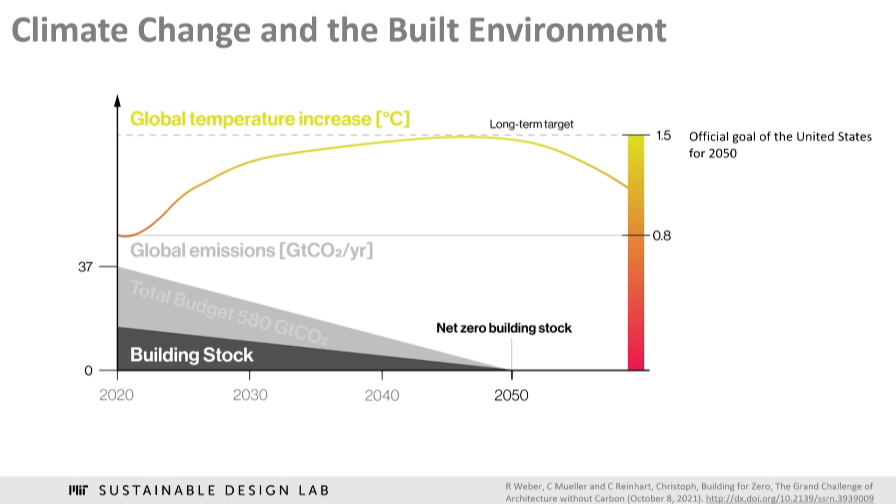We know buildings right now are responsible for about 40% of carbon emission, so that black wedge is ours, so to speak. And it means in two simple numbers, we have 300 gigatons and 30 years left to have the whole global building stock carbon neutral. So that's our budget and the timeline that we have. So what are we going to do with that?

Well, first we have to look at how many buildings we're actually talking about. And what you see here is actually that globally the building stock is going to double in the next 30 years. So we basically have to focus on both the existing buildings, which are half of what we are expected to have by 2050, as well as new construction.

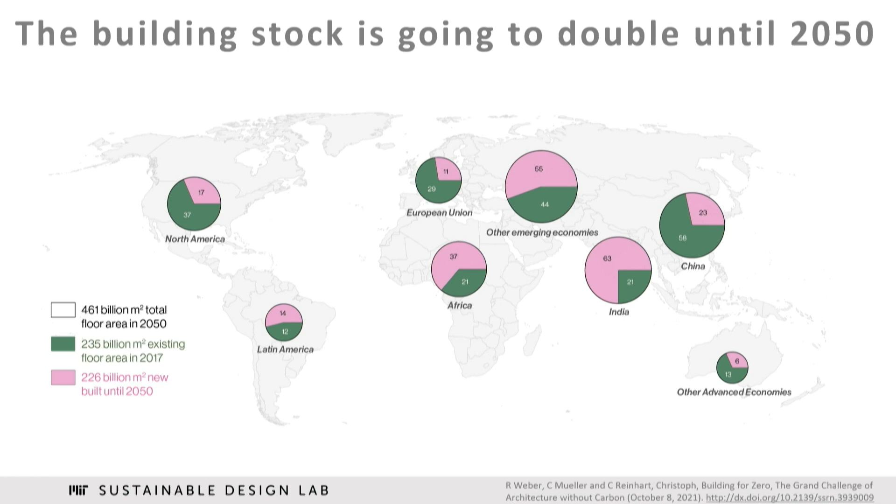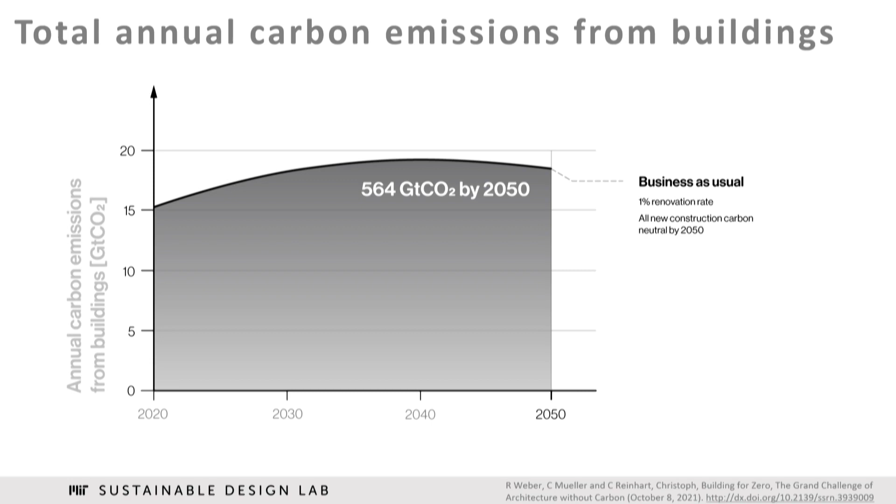And so if I start us off with a business as usual case, right now business as usual means that we are retrofitting about 1% of the global building stock every year. And we might, by 2050, have solutions for carbon neutrality for all buildings. Then we're going to blow through the whole budget that we have as a humanity, and by 2050, we haven't gotten anywhere.

So what we really have to do is we have to focus both on the operational energy of buildings, so how much buildings use while they're being operated, heating, cooling, and electricity, and so forth, as well as the embodied energy. So all new buildings that are being built, we have to start ramping that down, use materials that are net zero carbon. And when we look at this, it's an enormous task.

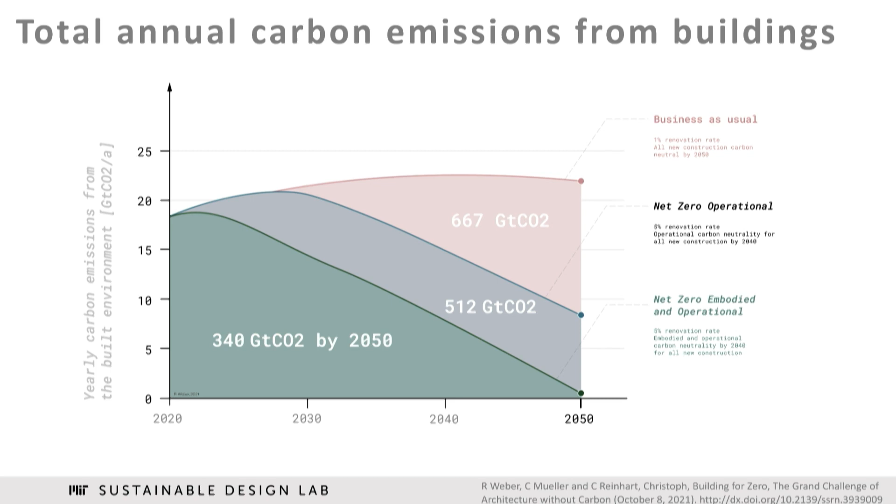Two simple kind of tasks for us to remember is we have to increase the annual retrofitting rate to 5% per year by 2030. And we have to make all new construction types carbon neutral by 2040 as well. So now let's jump into some buildings. How is this actually possible?

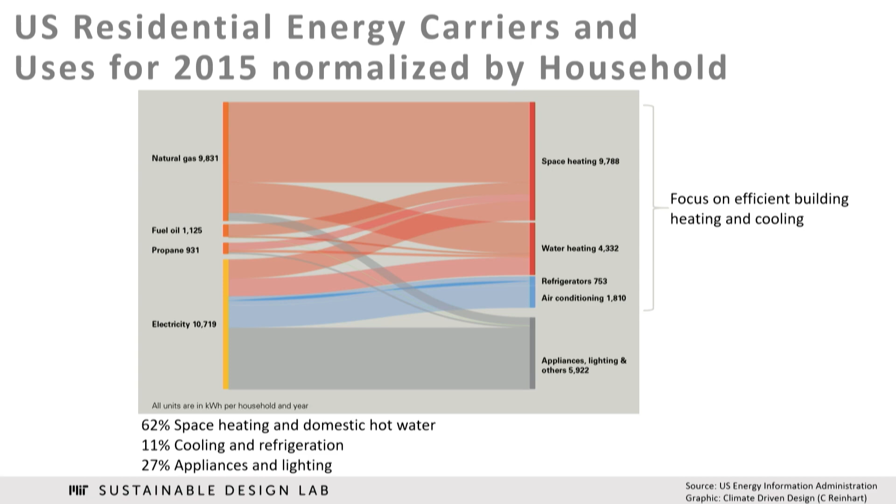What you see here is for 2015, the data for all residential buildings in the US, normalized per household: what did we use as fuel sources and how did we spend that in buildings? And you see natural gas, propane, electricity is the type of fuel sources that we had. And then we spend 70% of that on heating and cooling residential buildings. So this is where this strong focus comes from. We have to reduce that number.

So how are we actually going to do that? I think it's Mark Twain who said, talk is cheap unless Congress is talking. So we just heard there is a huge amount of funds available in the next couple of years. And so I'm going to tell you a little bit of a story of what an owner of a building might want to do and how that then relates to the grid as a whole.

So if you are the owner of a typical home in New England, this is what these numbers are specifically for, and the building hasn't been renovated, old building, you love it, you don't love your utility bills, which are about $3,900 per year, you spend $1,700 on gasoline, and you and your family, if you assume a family of 4, you are spending 16 tons of carbon per year.

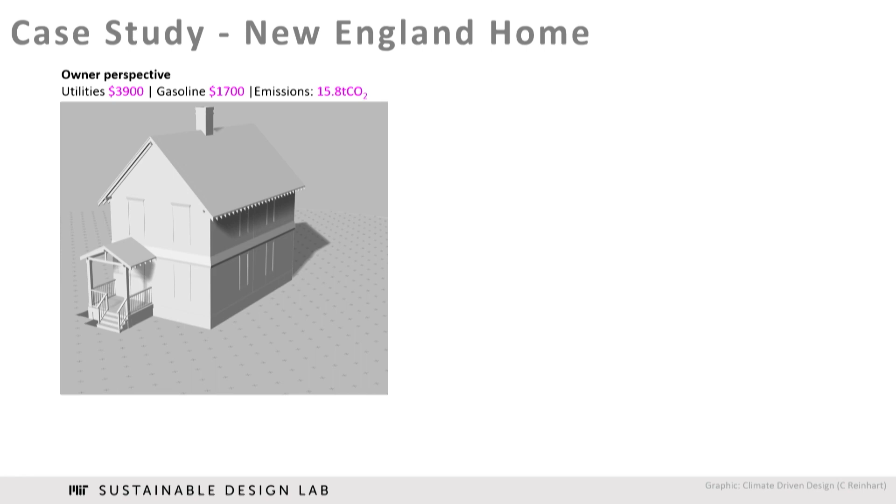So how do you look as a customer? Well, you are a great customer for natural gas. You're using an enormous amount, as you see on the right-hand side, during the winter months, and your electricity use is pretty constant throughout the year. You have a little bit of peaks due to the air conditioning system that you're using for electricity.

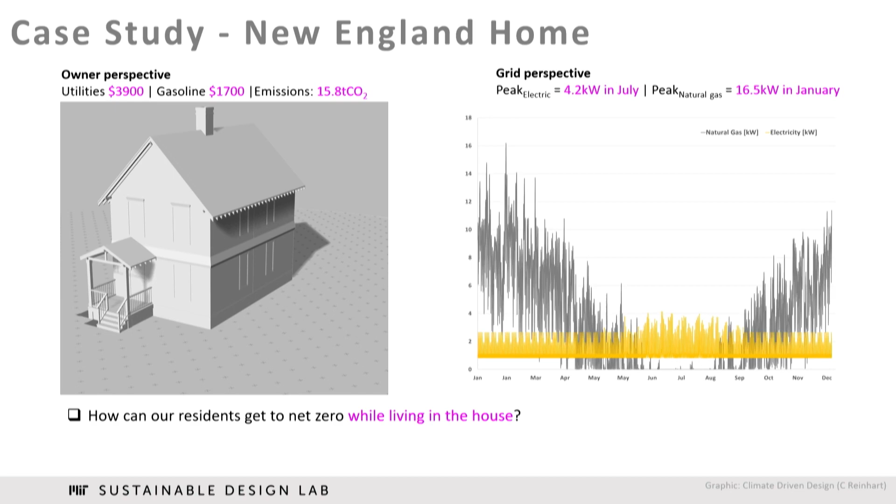So now you're opening the newspaper and people just tell you, oh, you should really get a solar system, do something good for the world and get a heat pump. And you think, yes, I want to do good in the world, so I'm going to place these big heat pumps in front of my house that everybody sees them, and I'm going to fill my rooftop with PV. So what would that do effectively?

So you're spending about $53,000 on that, and you get your money back in 10 years. And on paper, since you oversized your PV system, you get a couple of $100 every year back. You still spend all the money on your gasoline.

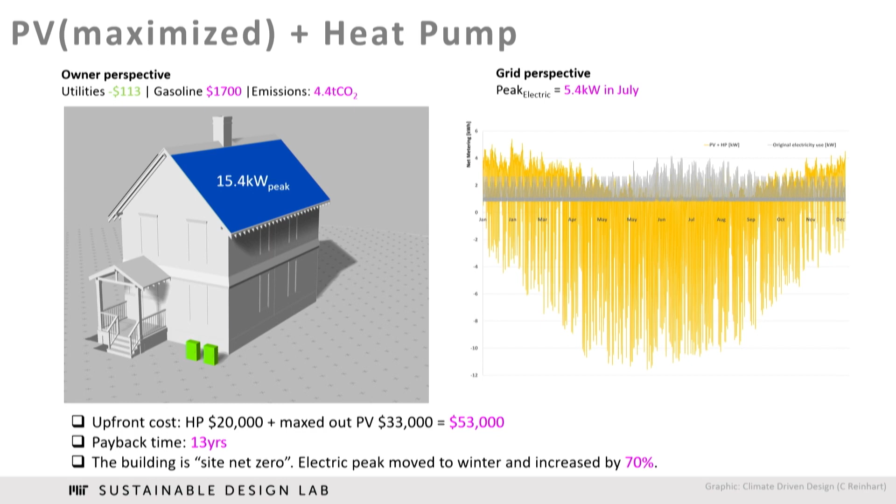How do you look on the right-hand side? Basically in gray, you see your old profile for electricity. In yellow, you see the monstrosity of a client that you are. You're basically somebody that dumps huge amounts of electricity when nobody wants it in the summer into the grid. And you increase the peak by 70% due to your heat pump. So the utility doesn't love you particularly and tries to convince you to do something else.

And so then hopefully you get a good contractor who's working with you and says, well, you should get efficient appliances, LED lighting, smart controls; Mass Save and other institutions pay for you to insulate your walls. And rather than having this oversized PV system, make the PV system as large as you actually need it. And when you do that, you basically now are dealing with 10 years of payback time for a system like this.

And when you look on the right-hand side, what happened, you still moved your electricity peak to the winter, but at least it's the same height as it was before. So that just shows you it's of paramount importance that we retrofit our buildings. But then you don't like it that your roof is not full of PV. Is there any more money to be made?

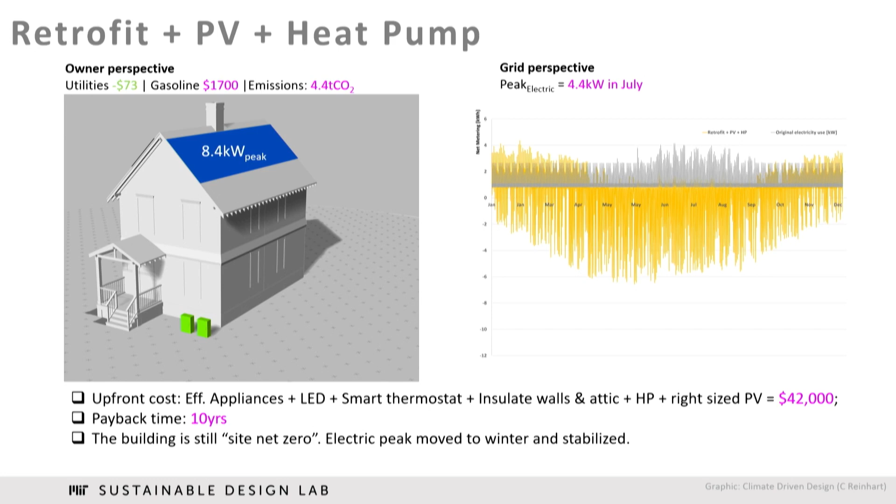So you're going back and you're starting filling the free area up again, and you're buying an electric car, nice Tesla, your neighbors are green with envy. So what happens then? You actually end up in a situation where you have no money that you spend on driving your car around anymore per year for operation. Your bill and your carbon emissions are zero. And since gasoline is quite expensive, well, not really, but relatively speaking, in 8.5 years you basically get your money back for the steal of $48,000.

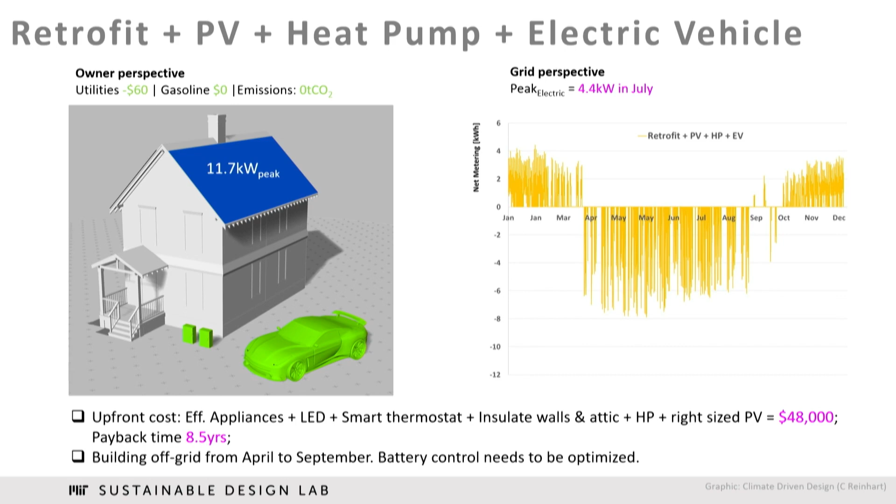So this just shows you that it's a really complicated system and very different things that you can do. And you can actually improve the peaks even more if we start integrating the controls better between how your Tesla is charged and discharged and the grid overall. So now you might wonder, is anybody willing to spend $50,000 on retrofitting their building?

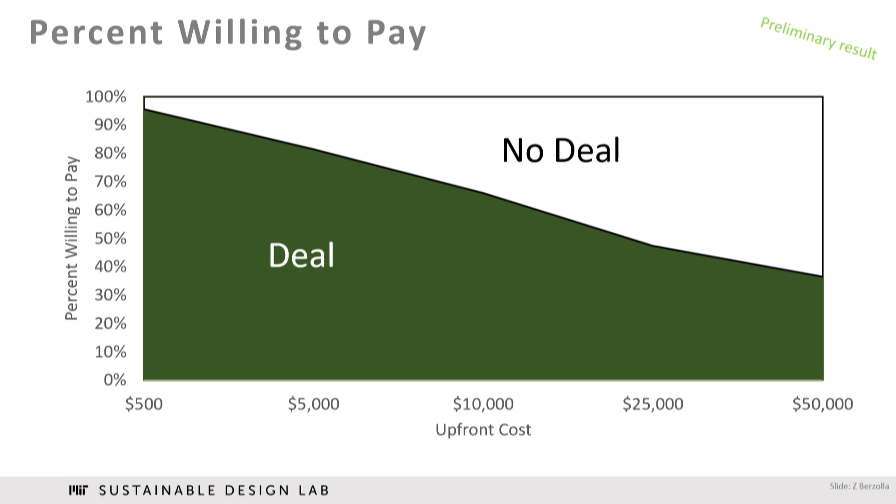We recently, through the center that Rob mentioned, did a survey with 1,500 homeowners in National Grid territory, and this is basically the deal, no deal line in terms of willingness to pay that we found. So 90% of owners will spend certainly $500, but you still have a respectable 30% of building owners surveyed willing to pay $50,000. So that's a sizable portion. Unfortunately, or not surprisingly, if you overlay income level, it's the higher income levels that are going to do this, that have money for this.

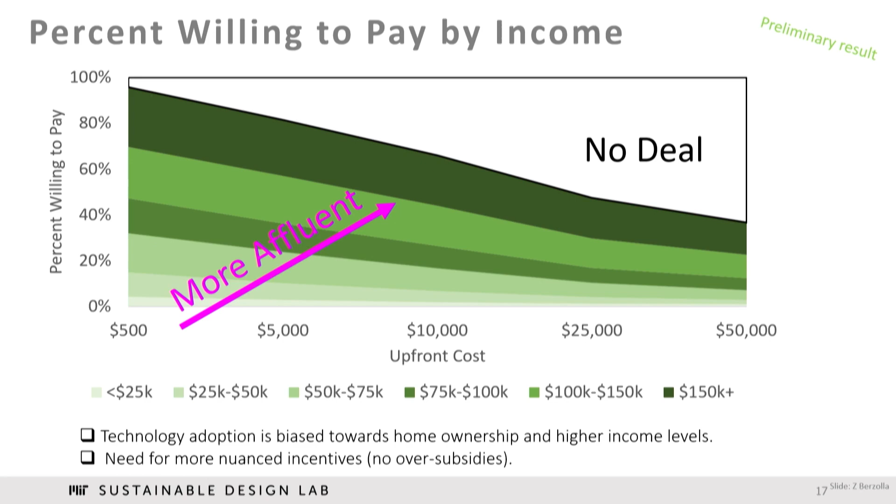So what this means is if we really want to have this type of development on a wider scale, we have to be very clever on how we're going to spend all this money that Rob promised us earlier today and make sure that everybody is basically benefiting from this. Right? So just quick words on new construction.

This is a trend, passive house, that you probably heard of that is really taking off in New England. I've taken this slide from Jeff Geisinger, who is the sustainability director of a mid-sized architecture firm here in town. And just to show you, they are working on 8 of these multi-unit residential passive houses. So these are extremely low energy residential buildings, really good envelope, tight envelope, and good ventilation systems. And a fair number of these projects include affordable housing as well. So this is really just a sweet spot right now that is worthwhile paying attention to.

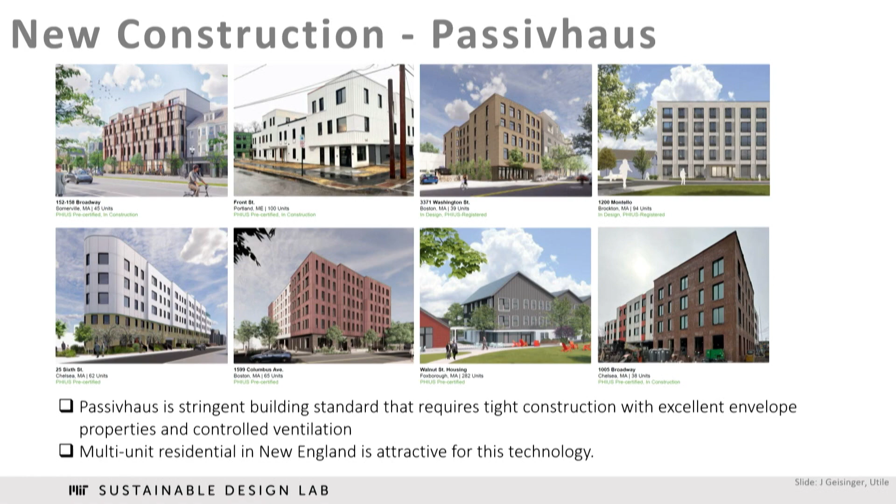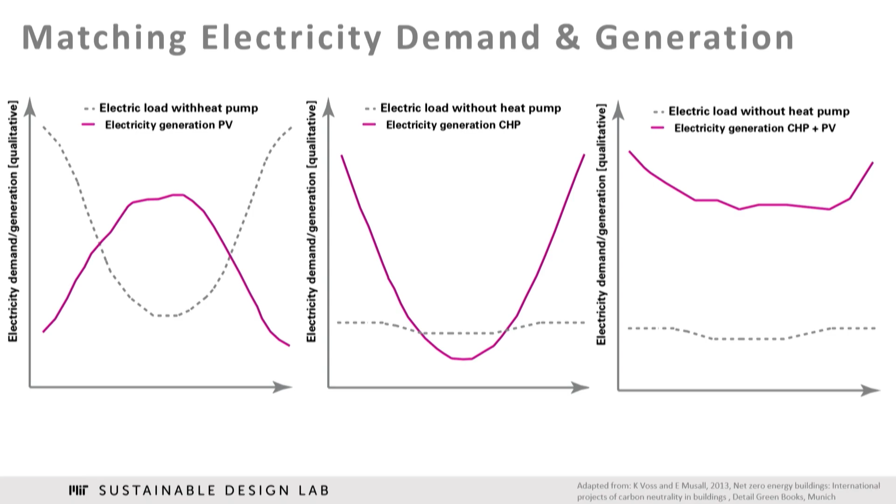Thank you. See if I can find the... Do you know, does it just keep going? Yeah. Where is the mouse? Oh, there it is. You see it? We lost the pointer. Yeah. So funny. Can you help us? Oh, there was some movement in the corner. Okay. All right. Okay, so I need to close this. And, where is mine? Hello. It's all in one. Good. All right, thank you very much. Can you turn it so you can see? Go one further. Okay, good.

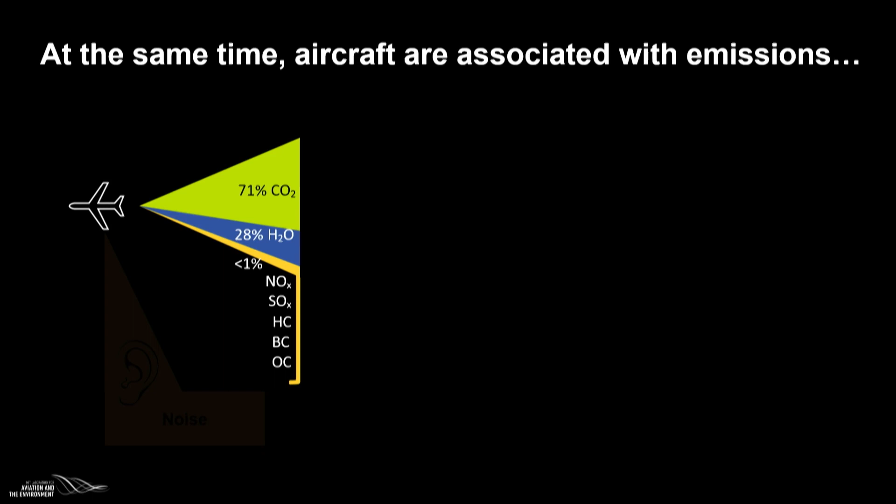All right, so I'm going to talk to you about aviation. As you know, we like to fly around, and as the world gets richer, more and more people like to travel. But of course, this has a problem. All that wonderful travel that we can have is associated with a lot of emissions. And the emissions affect the climate, and they affect air quality, and so human health, in a lot of different ways.

And so if you try to add up the harms from the different emissions, it turns out you have a lot of climate harm, primarily from the CO2 emissions, some also from the formation of contrails, which tend to net warm the world a little bit. And also you get a lot of air quality problems, some from particulates, but mostly from the NOx that's emitted by the jet engines as they fly.

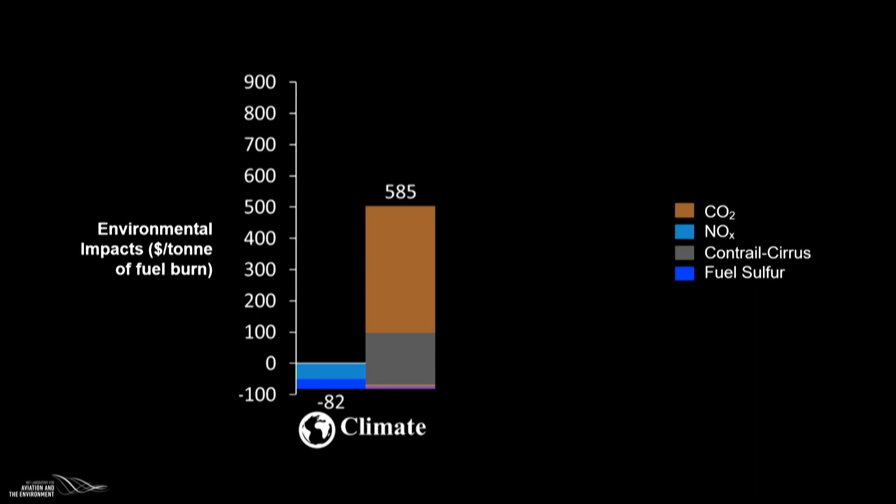And the total harm is about $860 per ton of jet fuel that's burned, which coincidentally is similar to the total cost. The economic cost of jet fuel is about $840 per ton. So the cost that the airlines or the passengers are paying for the jet fuel is only about half of the true cost to society. And the other half is borne by all of us by the fact that it's affecting the climate and it's causing medical problems for people.

So how can we fix this? There's kind of three directions. So one is you can change the way you operate aviation to try to minimize the contrail formation. I'm not going to talk about that. You can also reduce the CO2 emissions by going to low carbon fuels. I'll talk a bit about that since I'm a chemical engineer. And you can also do catalysis to try to reduce the NOx emissions, to reduce the health harm.

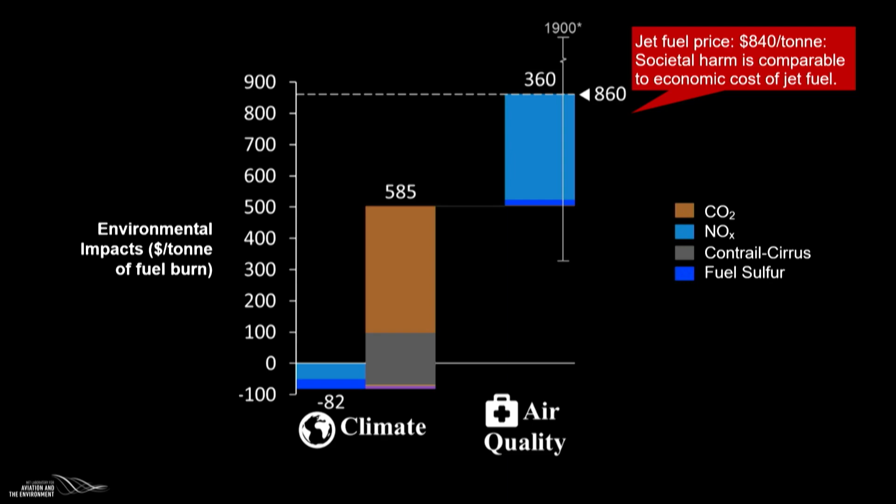So first let's talk about the low carbon fuels. The way it's being done right now is that almost all the jet fuel is fossil fuel from petroleum. But the airlines are starting to incorporate what's called sustainable aviation fuel, which is fuel that's made from biomass. It works fine, and it's a business, and I forget, a certain percentage of the jet fuel is sustainable aviation fuel. And fundamentally, that's coming from biomass and from food waste right now, actually, too.

However, this approach, which we're doing now, has some limitations. So one is if you account for the life cycle emissions, the sustainable aviation fuels are not really zero carbon fuels. They actually have pretty significant carbon intensity, and these are different types of sustainable aviation fuels, and the bars show what the actual emissions are.

And so, for example, if you used ethanol from corn to make your jet fuel, it would turn out that the total life cycle emissions would be about the same as using petroleum jet fuel. So you wouldn't actually gain anything by doing that. But some of the biomass routes actually do significantly reduce the CO2 emissions, but none of them go to zero.

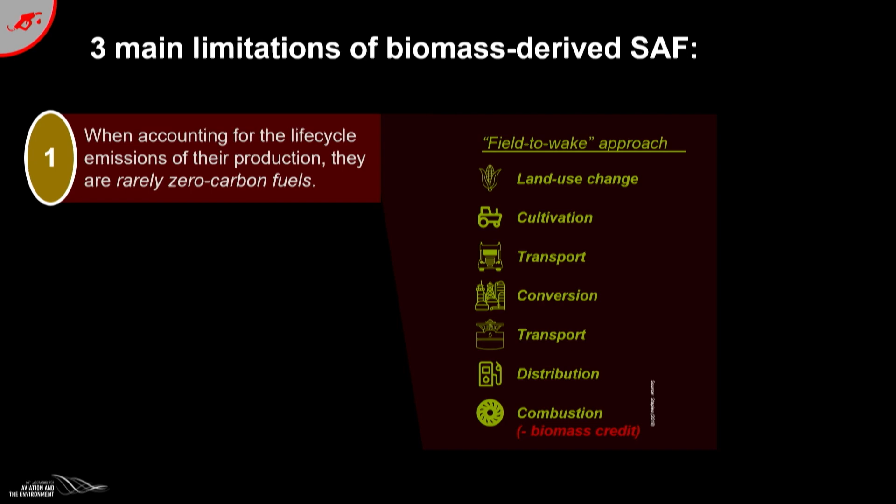Also, the biomass-sourced SAFs, sustainable aviation fuels, are more expensive than the petroleum fuels. And so this is going to be true for almost all solutions to climate problems: it's going to cost more. It's not unaffordable, but you have an economic, policy, regulatory problem of how you get people to go for a more expensive option instead of sticking with the already developed option, which is cheaper. They call it willingness to pay, but it's sort of how willing the government is to force people to do it, which is a key issue.

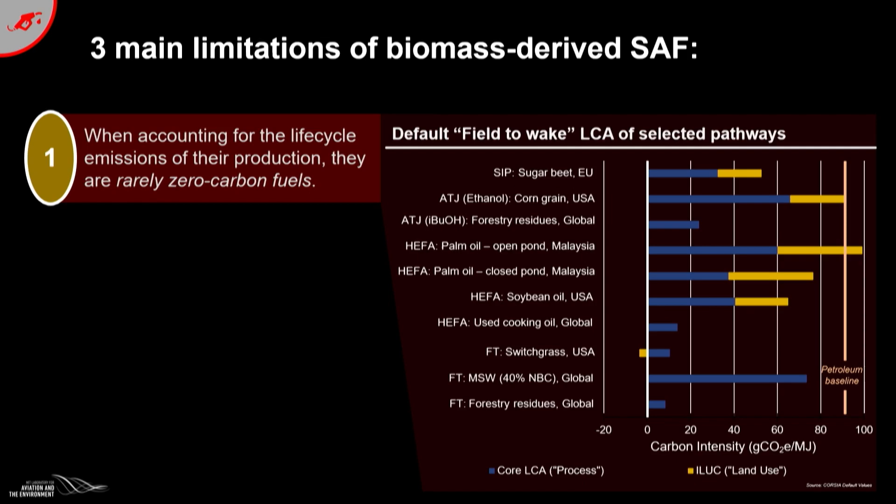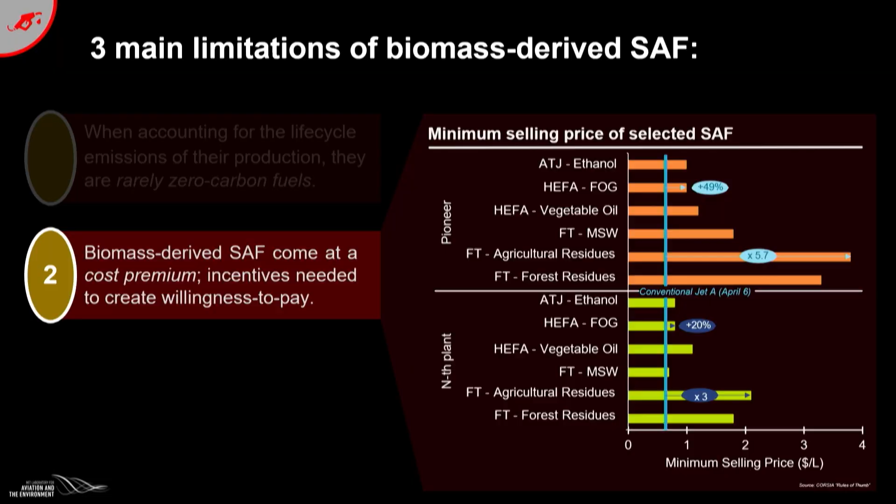And then the last issue is the availability of the biomass. It's as likely that there's not enough biomass, or maybe marginally enough biomass in the whole world, to supply the sustainable aviation fuels. But as was just mentioned by Christoph, other people want to use that biomass too. For example, the Europeans want to use it to heat their buildings. Some truckers like to put it in biodiesel in their trucks. The people who are driving ships would like to use it. People who are making chemicals and plastic want to use it too.

So there's going to be a coming war or fight over who gets to use the biomass. But the aviation field is confident that they're going to get it all. So that's the current strategy of aviation fuel: this is plan A, it's also plan B, and mostly plan C too, to get the biomass. Now this raises an issue: can you do something else?

And actually what you can do is use hydrogen that you make some clean way and use it to extend the biomass. You still need to make hydrocarbon fuels to run an airplane because they're the only fuels that have high enough energy density to drive long distance aircraft. But you can make hydrocarbon fuels by taking biomass and adding a lot of hydrogen, and that actually conserves the carbon atoms in the biomass, so you get more jet fuel for the same amount of biomass.

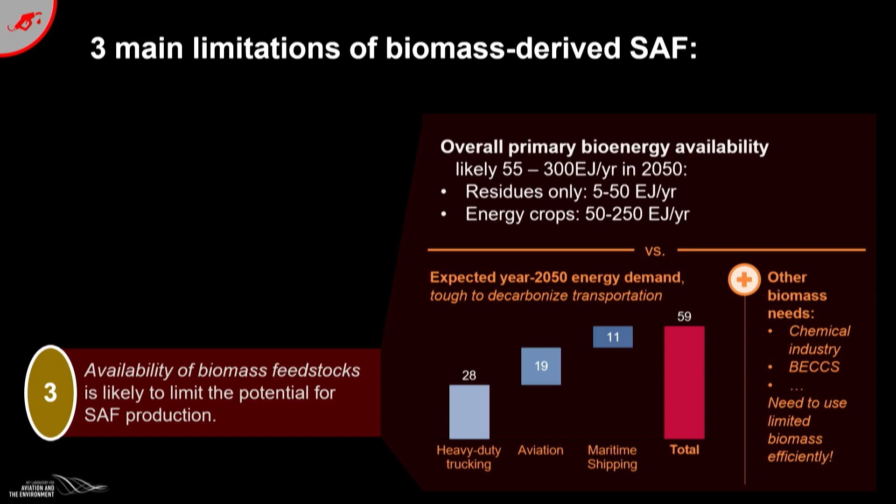So that's one idea. Another idea is you can just try to react the hydrogen with CO2, for example taken from the atmosphere, and you definitely can do it. It's expensive. You need to capture all that CO2 first from the atmosphere, not so easy because it's only 400 parts per million in the atmosphere. And secondarily, you need to make a lot of hydrogen, because you need 3 moles of H2 per 1 mole of CO2, since you need 2 of the hydrogens to remove the oxygen atoms as water. So you need quite a lot of hydrogen, which makes the cost much higher.

You need much more hydrogen, and the hydrogen is the biggest part of the cost. To make that much hydrogen, if you're going to make it as green hydrogen, you need a tremendous amount of electricity. So you can see that if you go that route, you're going to drive electricity production up and up, and you won't be able to just use the cheap versions of renewable electricity. You're going to need more, so you have to use more and more expensive types of renewable electricity, like solar energy in Massachusetts, the expensive kind of renewable energy.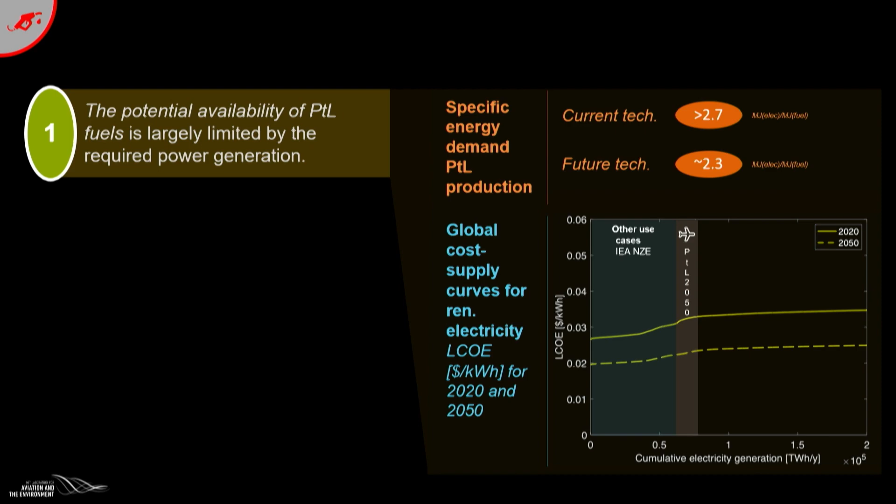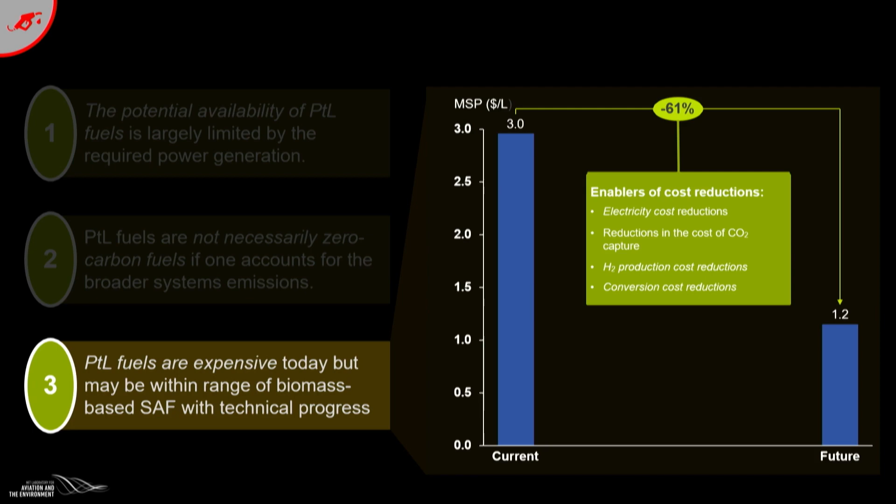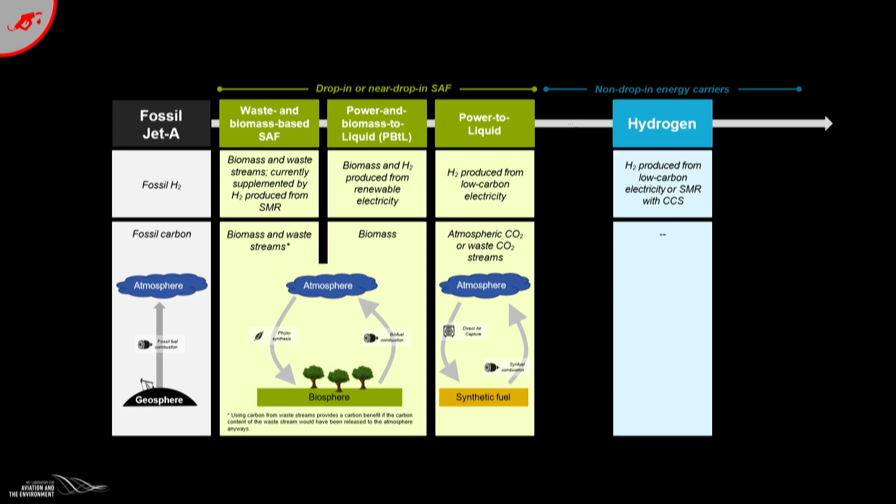And again, none of these options are actually zero carbon either. They still have residual emissions, though of course much lower than burning petroleum. And they're expensive, even more expensive than the fuels from biomass, but maybe the price will go down. So this makes people think, well, maybe we should just forget the hydrocarbons and switch to hydrogen. And you could do that. You can use liquid hydrogen, and it has a high enough energy density that it can work. From a purely energy efficiency point of view, it's actually more efficient to use the hydrogen directly instead of reacting it with CO2.

However, it introduces many problems. The volumetric energy density of liquid hydrogen is much, much lower than it is for jet fuel, so you need to use much more of the aircraft just to carry your fuel. Also, liquid hydrogen is a cryogenic liquid, not trivial to carry around in every airplane, and supplying it at the scale of a whole airport is a lot of liquid hydrogen. So probably you could do it, but it definitely does not look like a trivial thing at all to do.

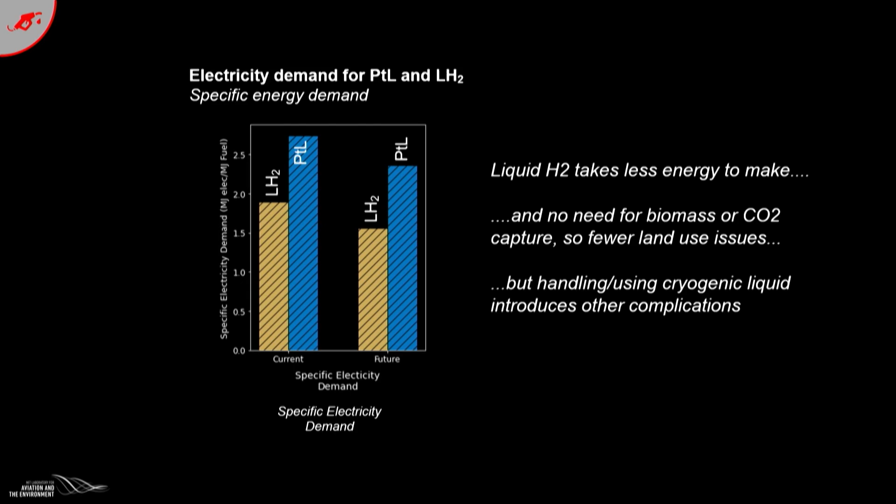And then finally, we'll talk about the NOx reduction. Right now, airplanes have no catalytic converter. Your car has a catalytic converter. It gets rid of most of the NOx. Therefore, with the modern car, if you take care of it, you're actually not making that much smog. However, the airplanes don't. They just burn the fuel and it goes.

You could change the airplanes to install catalytic converters, but then you can't really run a jet the way we operate them now, because the exhaust is zooming out, and you can't slow it down by running it through a catalyst, because you need the momentum of the jet to drive the airplane. So instead, you have to switch to electric motors driving fans to push the airplane along. Again, it's possible to do it, but not trivial.

But if you do that, then you can run a central power plant on the back of the plane that burns fuel and runs through a catalytic converter to get rid of the NOx. It may well be worth it, though. You reduce the societal harm a lot by reducing all those NOx emissions.

So the question overall is, does this whole idea pay off? Go back to the beginning. I said that the cost we're paying for jet fuel is wildly less than the actual cost to society. It's only about half, because there's so much harm. So if you count those harms, all these options could drastically reduce the harm, even though they increase the cost of the fuel, because they could reduce the CO2 harm and the NOx harm. So any of those options could work, despite all their troubles.

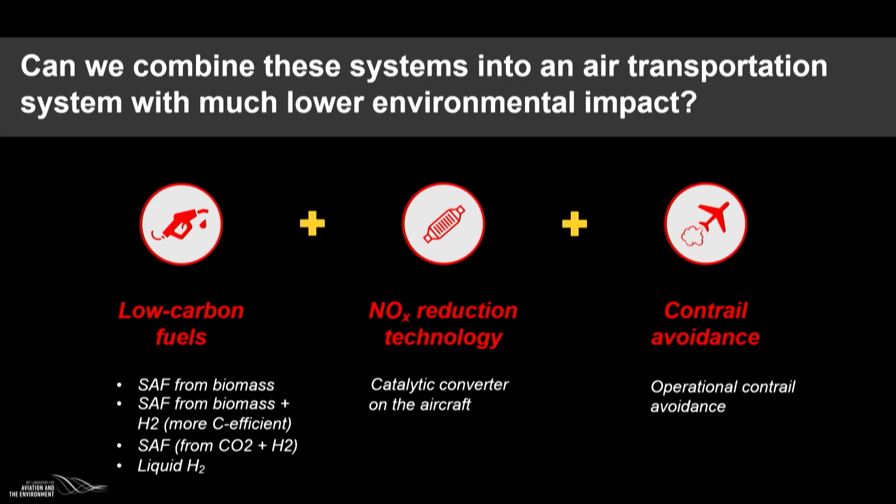The key question is then a societal question. We have a technically possible path towards not zero, but very low emission, low CO2 effect jet fuel. It's going to cost a lot more for the passengers or the people buying the jet fuel, but the societal benefit is that our medical bills will be lower, people will be healthier, we don't have sea level rise as much. So the key is how to balance: society is taking the benefit, but the people flying airplanes are taking the cost.

For rich Americans like us, maybe this seems fine, particularly if we get some nice bucks from the government to help it out. But to make the problem solved, we need it to work everywhere. We need people in India and South America and Africa and East Asia all to be flying airplanes that don't pollute and don't contribute to the greenhouse effect. But we're asking all those passengers to pay a lot higher ticket price. And who's going to force that to happen? I think this is a critical question.

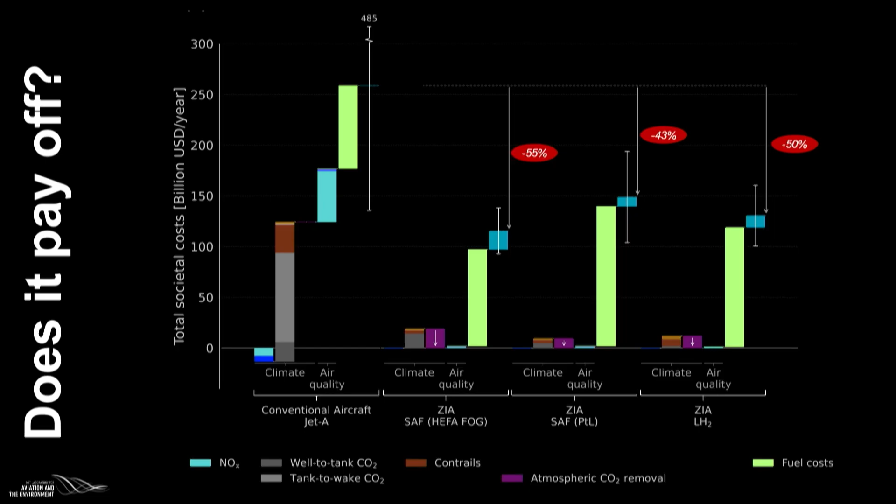So I think posing in the beginning that this was a US-centric thing is a very foolish idea. We have our own responsibility in this country to make our own net zero target, but the world problem is not solved with things like aviation until it works everywhere in the world. And so that's a key challenge.

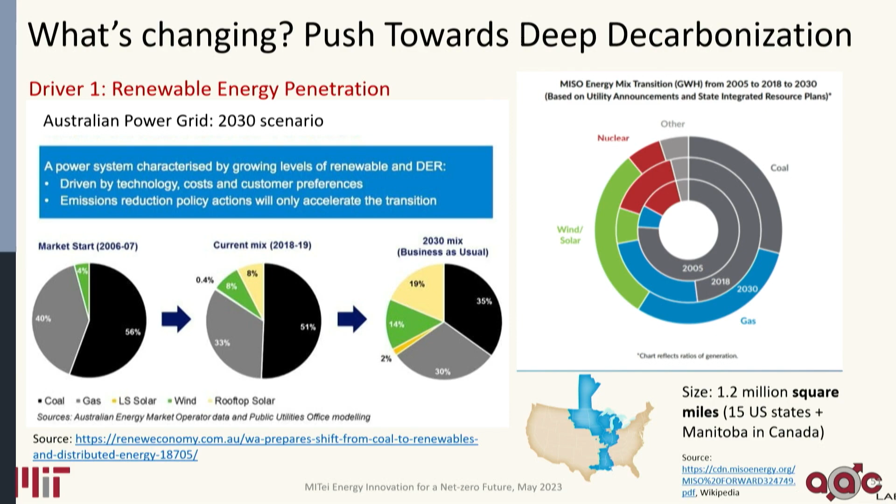So this is also echoed by all of the different initiatives that Robert talked about earlier. For instance, the Biden administration is talking about a solar power penetration of 45% by the year 2030. So if you now look at the actual U.S. energy mix and look at the different kinds of assets, you'll see that right now, if you look at 2020 kinds of numbers, nuclear and coal are significant, but the projections are really doubling the amount of renewables.

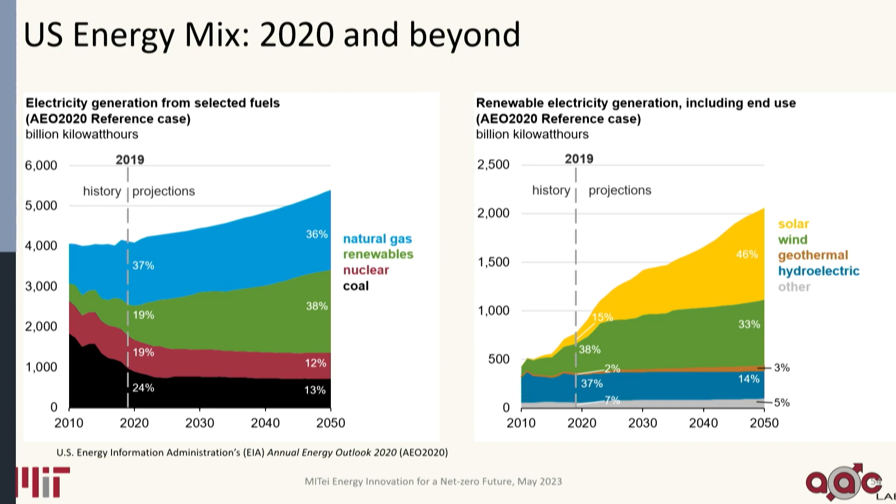And on the right side, the chart basically breaks down renewables into its various constituents of solar, wind, geothermal, and hydro. So full disclosure, these slides, all of them that I showed you so far, are actually maybe 5 or 6 years old. So compared to those numbers and those targets, we are now talking about numbers that are actually 100% renewable. So this is really becoming real.

And I just highlighted 3 of the states that have been talking about these numbers. So it's not surprising to you that California is highlighted, Hawaii is highlighted, but it's also interesting that Texas is highlighted. So the point is that this is no longer a projection. These numbers are becoming more and more achievable, more and more of a scientific fact than fiction.

So the specific town in Texas actually declared, and this was again some years ago, that they're going 100% renewable. I mean, it's a small town. It doesn't take a lot to really go 100% renewable. But still, the point here is that a municipality is taking this initiative to really move away from fossil fuel-based generation. In this particular case, I believe they were looking at a contract they were signing with a wind energy farm.

Hawaii, for instance, again, there's a big push towards 100% renewables, and they actually announced the closure of the last coal power plant. And the same thing in California, there is a significant push towards really carrying out the engineering economic analysis. The LA 100 study, for instance, is something that they're taking seriously, that they want to be able to achieve 100% renewable electricity by even 2035.

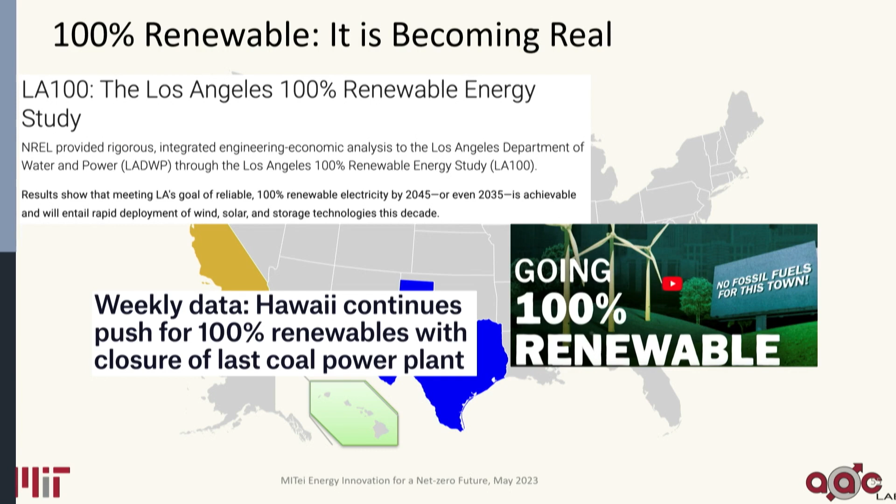So in all of these, in addition to what's happening in terms of producing electricity through renewables, the other driver is really this push, and again, you heard that both from the aviation and the buildings point of view, to electrify everything. And here too, if you look at what's happening with electric vehicles and the type of targets that all countries around the globe are introducing, you can see that there is a significant, aggressive target.

And it's not just limited to vehicles, and Christoph talked about smart buildings and increased electrification therein. And net energy homes are becoming more and more of a reality. So all of these things are actually introducing a different kind of driver where basic load patterns are changing and electric loads are actually increasing. So what this also means is that there are several kinds of technical challenges that affect how the electron actually reaches us in a reliable manner.

So these challenges basically come because much of the power plant planning and operations is a top-down approach, where every watt that is consumed at this moment is essentially a watt that is generated right now. So you need to have that balance of generation and demand, which again, you saw in the charts that Christoph showed you. And that's something that needs to happen at every point in time, at every point in space, which means that you need to have an idea of what kind of load you will see at a given time in a given location. And appropriately, you need to commission different plants in order to produce that amount of electricity.

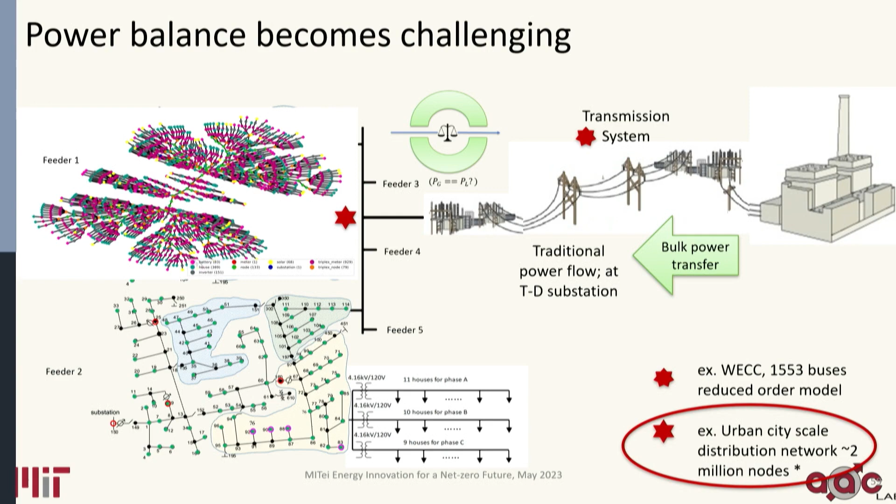For instance, ensuring that you have power balance becomes challenging because it's no longer just at the bulk level, it becomes highly distributed. If you take the number of buses, it used to be of the order of thousands, and now it becomes 2 million nodes if you take an urban scale decision making. So all of these different nodes, every one of them could essentially be a decision maker that is consuming or generating. And so having that kind of a coordination is going to be non-trivial.

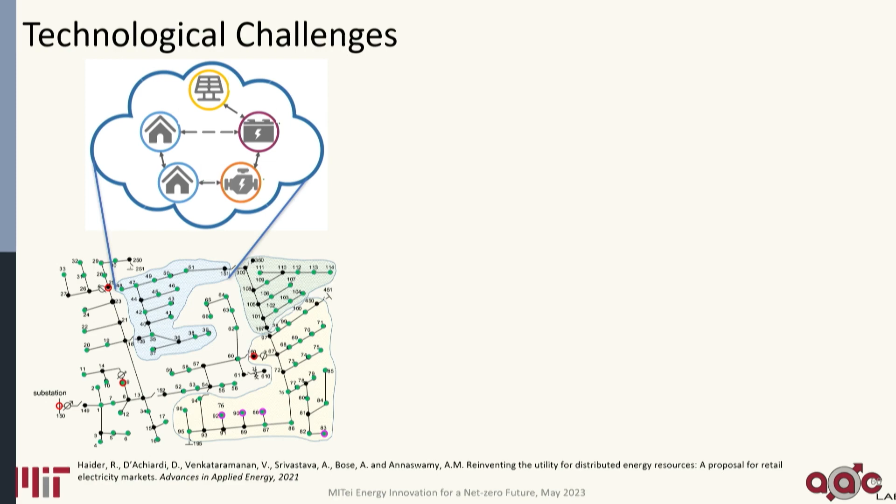So the kinds of technical challenges are that, first of all, you've got these multiple feeders. Each one of these feeders has devices which could be a battery, a smart building, a PV, a solar farm, or an entire EV charging station network that is capable of charging and discharging several vehicles. And so ensuring that these guys really talk to each other properly and have real-time balance, that's one of the challenges.

And these kinds of issues actually trickle down all the way to the house. For instance, all of our houses have three-phase electricity, and if you have imbalances there, that produces voltage and frequency fluctuations. A lot of these synchronous generators that used to provide electricity not only are easily adjustable, but also they provide this notion of what's known as rotating inertia. What that does is give you the ability to damp out any kind of fluctuations that can occur. Now, as we replace them with several small distributed energy resources, we've lost that inertia, and therefore we need other ways of introducing damping.

And that needs to happen through what are known as grid forming inverters, through smart power electronics, and all of these advances are actually happening. And I also already mentioned this top-down approach, how consumer demand becomes uncertain as buildings become smarter, and they could be actually producing net generation because of all of the PVs and EVs that might be connected to the system.

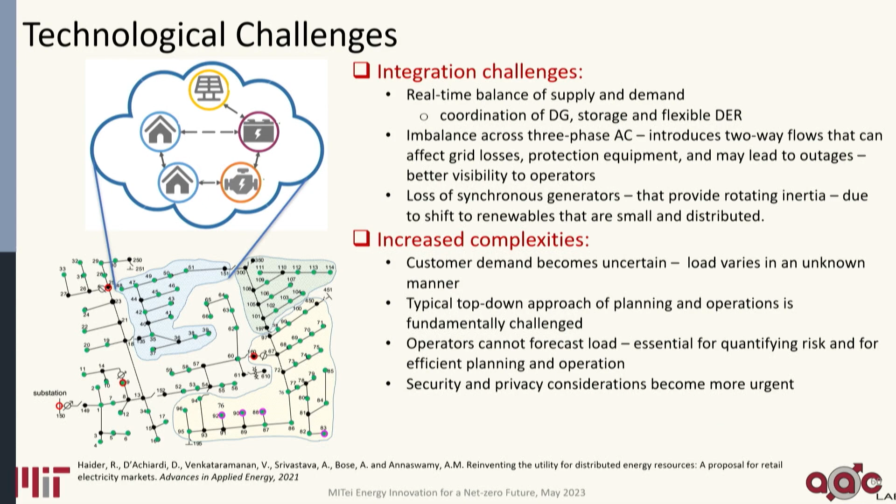But certainly emerging technologies in power electronics and control and communication can be leveraged. And so I just want to walk you through two short examples as to how some of this coordination can occur. So this is a study that we did in a simulation of a city in Japan, and there's basically a distribution grid with a high amount of renewable energy penetration.

And the idea there, again, was that for all of the different stakeholders, we assumed that there was a market structure where they could exchange energy. And this market structure then provided a way of transacting energy. And by doing that, we could impose a certain kind of locational marginal price across all of these different units. And that gave us a way of making sure that you can coordinate this energy transfer and make the grid indeed move towards 100% renewables.

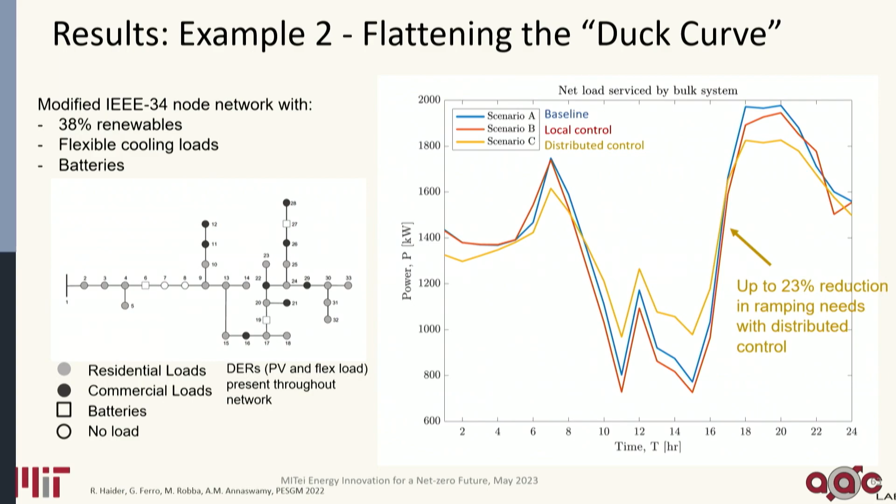But as the sun goes down, the demand rises sharply, and this is what's known as a duck curve. And so you really need to make sure, as the duck curve ramps up, that you have all of the units appropriately lined up. And when you have this distributed coordination that occurs properly, you can significantly reduce the amount of this ramp rate. So these are the kinds of innovations that need to continue to happen.

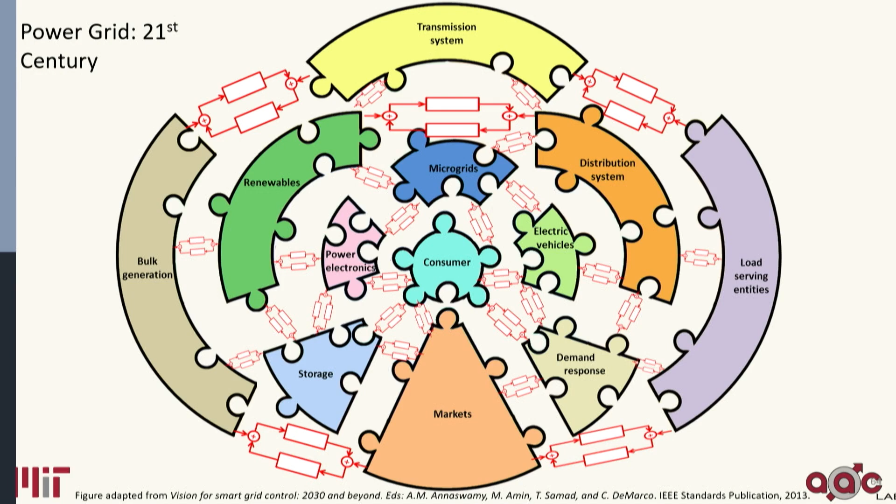And so while it's true that you really do have these multiple stakeholders with varying kinds of constraints and needs, there are ways in which we can actually have them all come together and really form this power grid for the 21st century. And this is not just a technology problem. It really requires technologists, economists, policymakers to all come together, because it's not just a simulation experiment. We actually want to deploy it.

And this is an infrastructure system that provides service, not just affordable, not just reliable, not just resilient, but also equitable. And that's something that we don't often pay as much attention to as we should.

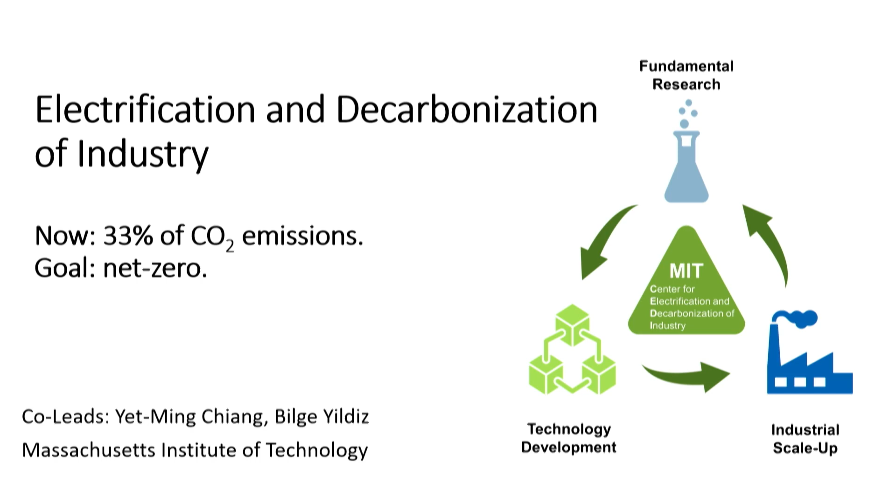And if you look at industrial products, there is, of course, a wide range of them. But if you look at the CO2 emissions from each of these, you can see that 4 of these industrial chemicals and materials constitute about half of the industrial CO2 emissions. So that translates to about 15% of global CO2 emissions coming from these 4 products. And these industrial pillars include ammonia, cement, ethylene, and steel.

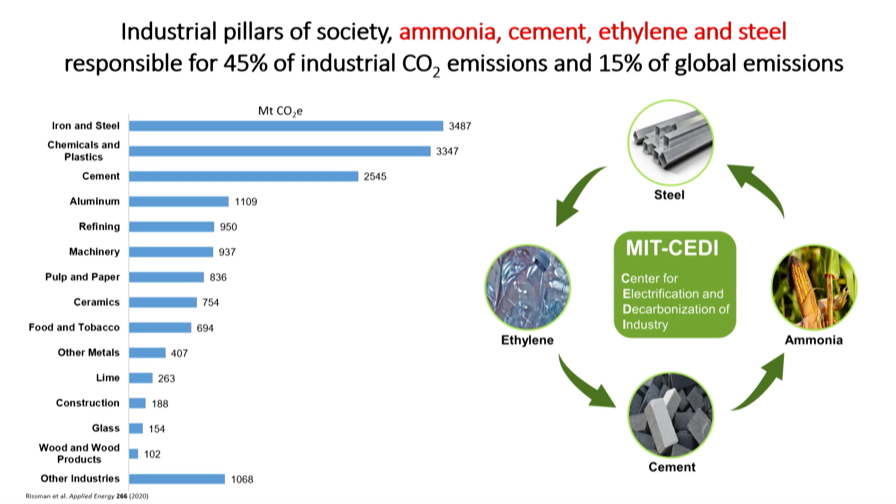And in our center, we are focusing on these 4 industrial products by leveraging fundamental research and technology development, all the way to enabling scale-up. And the approaches that we develop for decarbonizing these products, we believe, can be translatable to other industrial chemicals and materials over time.

And I hear that my sons came into the room. Okay, hi to them.

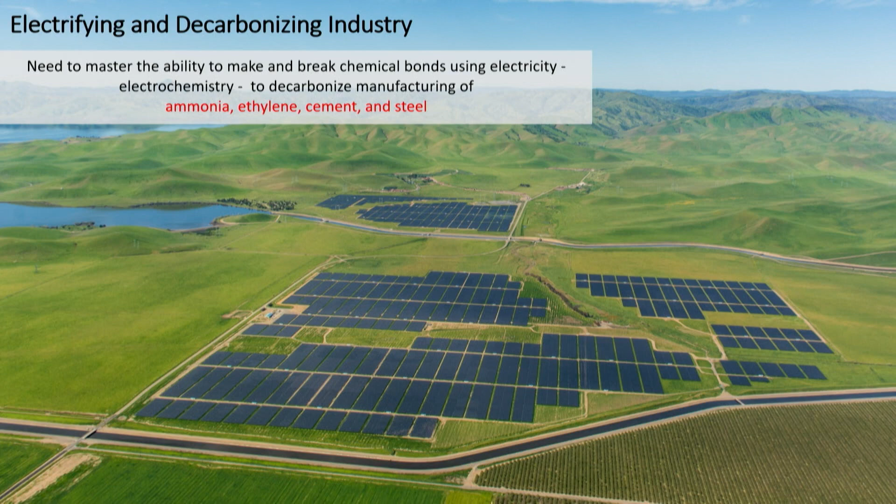All right, so the reason for the major CO2 emissions from these products is the following. The synthesis approaches to making them were invented more than 100 years ago, and they are primarily thermochemical processes which require large amounts of thermal energy input, which we provide by burning fossil fuels. And as you will see, our approach that will cross-cut the rediscovery of how we synthesize these materials is use of electricity, clean electricity where we can find it, and not only to convert it to thermal energy for the existing synthesis processes, but rather to use electricity to break and remake chemical bonds, which we refer to as electrochemistry.

So if you look at cement first, and the CO2 problem of cement, 1 ton of produced cement emits 1 ton of CO2. And this is about 4 billion tons of CO2 emissions annually at present, amounting to about 8% of CO2 emissions worldwide.

And cement is essentially calcium silicate hydrate, so you need to be able to supply lime, and currently it comes from conversion of limestone to lime, and that constitutes about half of CO2 emissions from cement already, and the other half comes from the heat that you provide into the kiln.

And Yet-Ming Chiang's group has invented a room temperature electrochemical approach that enables that limestone to lime conversion, again at room temperature, using electricity, that slashes 50% of CO2 emissions from cement right there. And we are pursuing advances to this technology and ultimately to scale up and implement it in industry.

So second is steel. And the way we are currently making steel is by using a reducing agent to get oxygen out of iron oxide as you mine the iron ore. And we're doing that by providing carbon sources such as coal or methane. And thus your CO2 emissions come to about 2 tons of CO2 emitted per ton of steel that you produce.

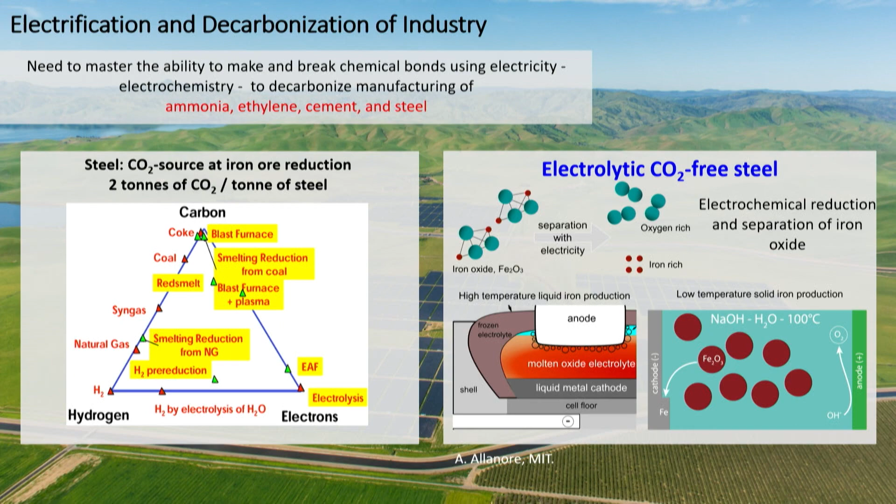Alternatively, we can use electrons, electrochemical processes directly to reduce iron ore, to reduce iron oxide to iron metal. And Antoine Allanore and his team are pursuing this approach both at room temperature as well as elevated temperature electrochemistry to cleanly go from iron ore to iron using electricity.

The third, and that is in fact among the chemicals the highest energy consuming and largest CO2 emitting chemical, is ammonia, that feeds the world as a fertilizer and also is considered as a high energy density fuel, a high energy density hydrogen carrier.

And currently we are making it again through a thermochemical process, the Haber-Bosch process, where we are providing thermal energy input by burning fossil fuels, and we're also having to provide hydrogen as a reactant, and currently we're producing hydrogen with CO2 emitting processes. So that gets you to about 1.5 tons of CO2 emitted per ton of ammonia that you produce.

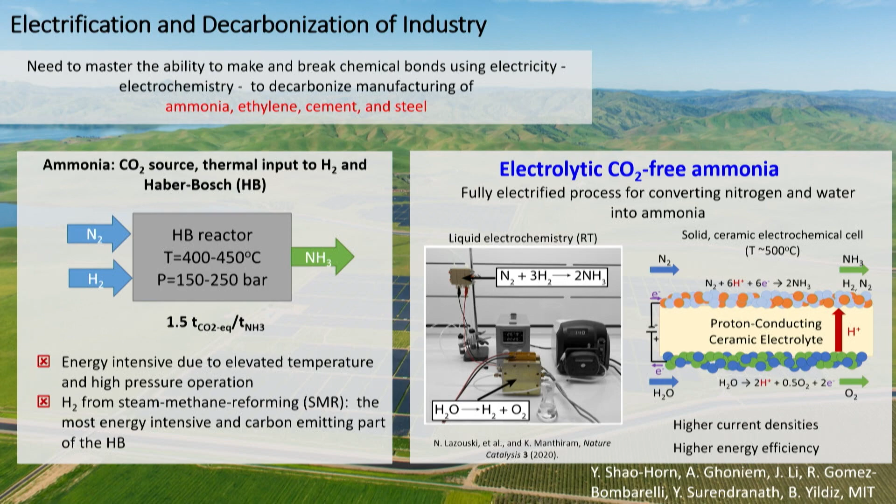At MIT, we are again pursuing electrochemical approaches that take nitrogen and water to give you ammonia, either through liquid electrochemical routes or elevated temperature ceramic membrane-based electrochemical routes. And while I'm putting these schematically here, of course, there are research and development challenges that our team is actively pursuing.

So the fourth is ethylene. It's second only to ammonia among the industrial chemicals in terms of its CO2 emissions and volume. And again, currently we're producing this thermochemically by steam cracking of ethane or naphtha, giving you nearly 3 tons of CO2 emitted per ton of ethylene that you produce. It's a highly endothermic process, a lot of thermal energy input that you have to provide.

And alternatives include, again, electrochemical processes, such as electrochemical oxidative coupling of methane. And a key leverage that we can have by using electrochemistry here, as I will show you in a little bit more technical terms, is to improve the performance of this process, in particular simultaneously improving the conversion rate as well as selectivity to the product that we want, which is the C2 products, ethane and ethylene, rather than deeply oxidizing methane.

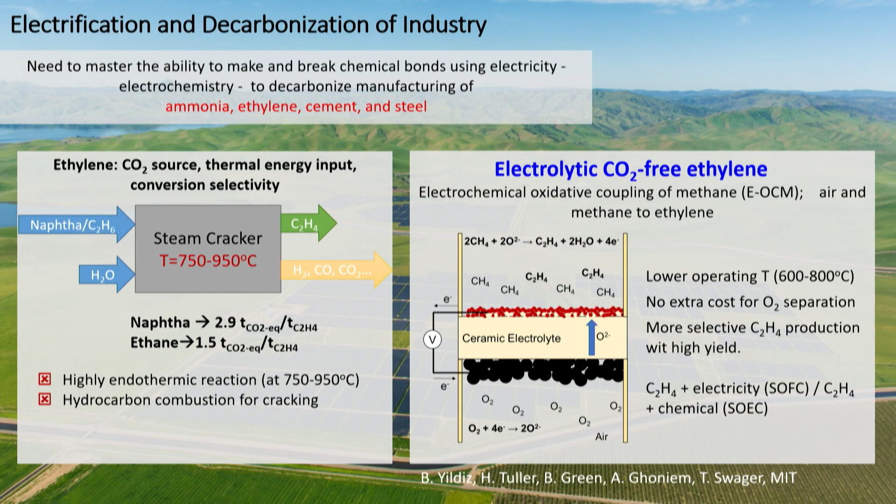And the OCM process itself has its advantages intrinsically, such as this process being exothermic rather than endothermic, that can allow you to lower the operating temperature and the energy input that you have to provide. But it's not so far competitive, right?

And the key challenge in getting OCM to work effectively for ethylene has been, as we try to go to conditions that increase the conversion rate of methane, going to higher temperatures to improve the kinetics of these catalytic reactions, we lose selectivity to the product that we are trying to achieve, the C2 products, ethane and ethylene. So can we leverage electrochemistry to beat the selectivity-conversion competition?

So again, among these, only with ethylene, I'll give you a glimpse of the technical work so that you have a feel for what we are doing also with the other three products that I have described that we are electrochemically resynthesizing. Okay, so OCM electrochemistry, can we do that, and can we really get simultaneous increase of conversion rate and selectivity?

And for this, we're adopting solid oxide fuel cell-like electrochemical platforms, so all ceramic, rather cheap materials, and we can directly adopt the materials, for example, for oxygen reduction or oxygen anion transport from the state-of-the-art cathode or electrolyte materials that we are already working with from the solid oxide fuel cell field.

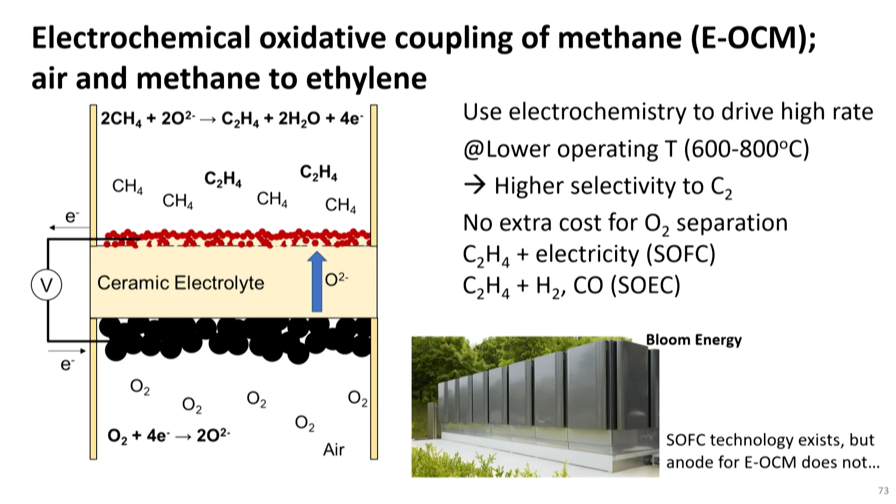And when we do get these to work efficiently, in fact, you can co-produce, say, electricity together with ethylene as a useful byproduct if you are using air as your oxygen source, or if you are using water vapor as your oxygen source, you can co-produce hydrogen as a useful byproduct together with ethylene.

And the key advantage of electrochemistry is that I can control my conversion rate by controlling my current density in the cell and choose a temperature which is lower than conventional OCM that can give you higher selectivity to C2. And can we really achieve this, right?

So if we look at one preliminary but exciting result from this work, we can see that as we increase the current density in this solid oxide electrochemical OCM, we increase not only the conversion rate of methane to whatever products we are producing, but also the selectivity to the C2, to ethane and ethylene. And we have a hypothesized mechanism that gives rise to this very interesting behavior.

And as you can see, the increase in selectivity to C2 onsets at the same current densities where we are onsetting the oxygen evolution reaction, which could be considered as a side reaction, but the intermediates that we form in this oxygen evolution reaction, electrophilic oxygen species, are also important for catalysis, activation of methane, and we think the two are coupled, and in fact the electrochemical oxygen evolution is in this case assisting the oxidative coupling of methane, and thereby giving us a leverage to simultaneously increase selectivity and conversion rate together.

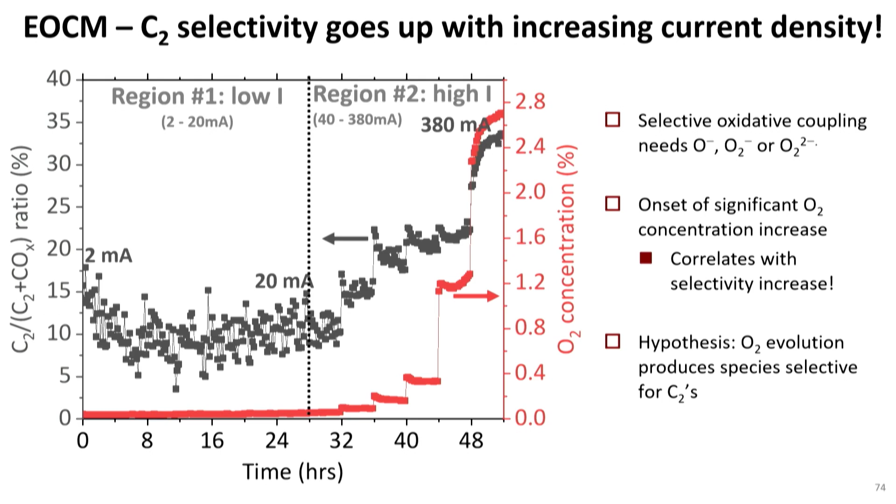And we're continuing our research to actually improve this material and improve also the energy efficiency of the OCM process. So I cannot but talk about mechanisms in my talks, so I had to share with you a bit of it at least. But stepping back at a higher level, we also have to consider an integrative approach where we are not only working on advancing the materials, devices, technologies that go into the decarbonized synthesis of these products, but also look for integration among them.

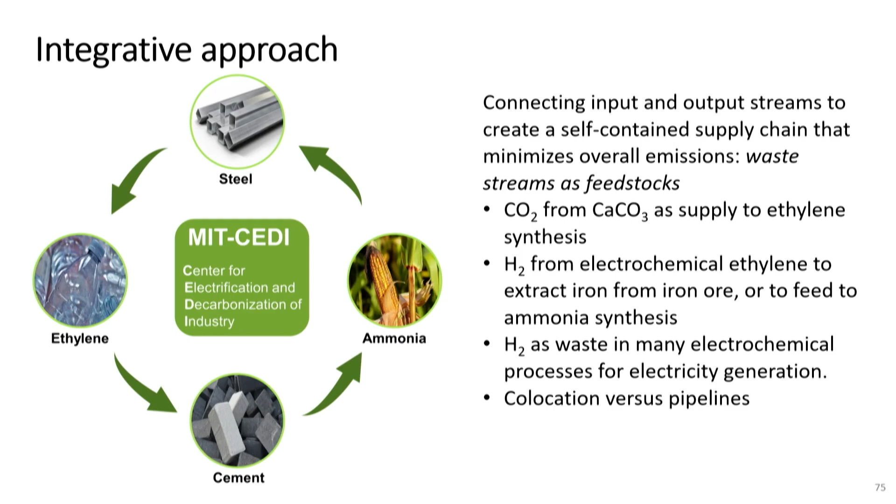In particular, what could be considered as a waste stream from one process could be a feedstock to another. For example, CO2 that is generated from the limestone to lime conversion reaction could be a feedstock for electrochemical ethylene synthesis. Or hydrogen that is a byproduct from electrochemical ethylene could be used for clean steel or iron production. So we really have to pay attention to what are the best techno-economic and systems analysis ways of integrating these different processes. So I'll stop here and transfer to Dennis.

So I was told to, so somebody, I think you are no longer after my slides. Let's see. Are we all on the same slide then? Because I told them to cut here, so I'm trying to look for yours now. I cannot. The cursor is lost. Where's the cursor? We need the technical support again. It's all one deck, right? So it's all one deck, but I had a bunch of backups, and I told them to cut here if they wanted to put in one deck. The cursor's gone. Oh yeah, it came back, but it's not active. Oh, there you go. Okay, I think we found it. The cursor came back. Good. Okay.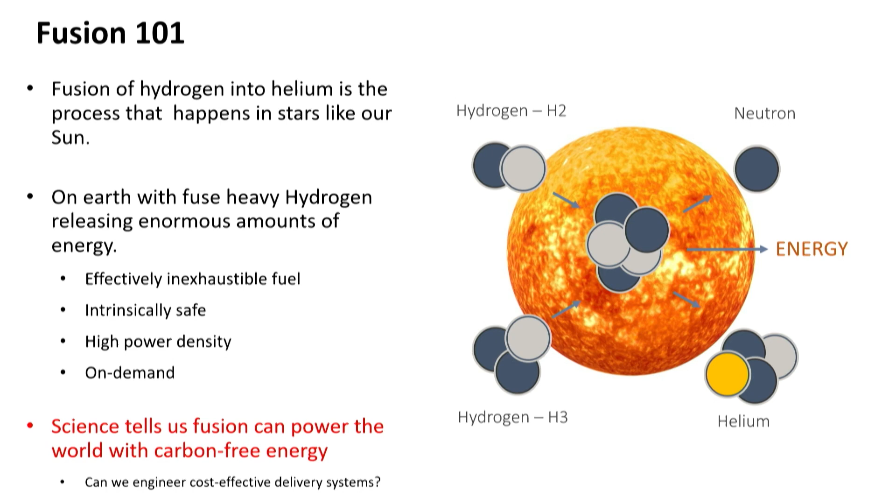We've known the science of this for a very long time: essentially it's an inexhaustible energy source. The fuel is freely available, and it is carbon-free because you basically are converting hydrogen into helium at the nuclear level. It hasn't really been a question of whether we understand the science or the implications of this. This could literally power our entire civilization. The problem was, could we actually come up with engineering solutions and systems that would be able to deliver this at an economically attractive target?

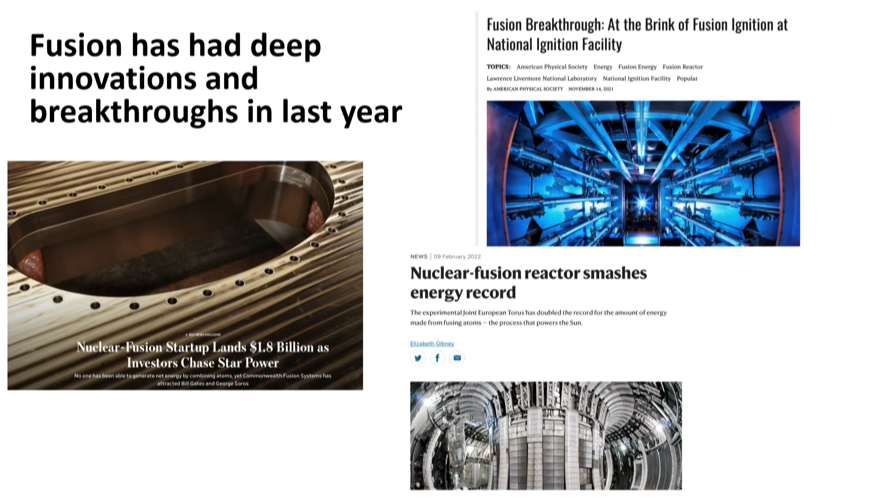So what has happened with fusion is, I think, because of a couple of things. One, there's been an evolution in technologies, which I'll talk about soon, but it's also the drive. This wasn't a problem that we thought we had to solve 30 years ago, and now we know it is a problem that we have to solve. And this has led to a series of innovations, not just in technology, but I think in the systems that we're using, and I'll conclude with that.

And you've seen this news, at something called the National Ignition Facility. It's been really, really exciting. But I'm going to primarily focus on what we've done at MIT, because that has a particular connection to commercialization. And this is one type of innovation.

So to make fusion happen on Earth, you basically have to replace the gravitational force that makes fusion work in stars. So you use the electromagnetic force. What we did about a year and a half ago is we demonstrated a new kind of technology that makes that magnetic force much more effectively. It made a magnetic field that's about 1 million times the Earth's magnetic field. And when we were running it, it consumed almost zero electricity because it was in the superconducting state.

What this meant from an economics point of view is that overnight we had an innovation that allowed a factor of 20 to 40 improvement in the cost per watt from fusion based on this approach. And this also allowed us to try this thing on the right, called SPARC. It allowed a program and economic resources to make this big throw, because it greatly reduced the size of fusion devices, by about a factor of 30 to 40 compared to previous technologies.

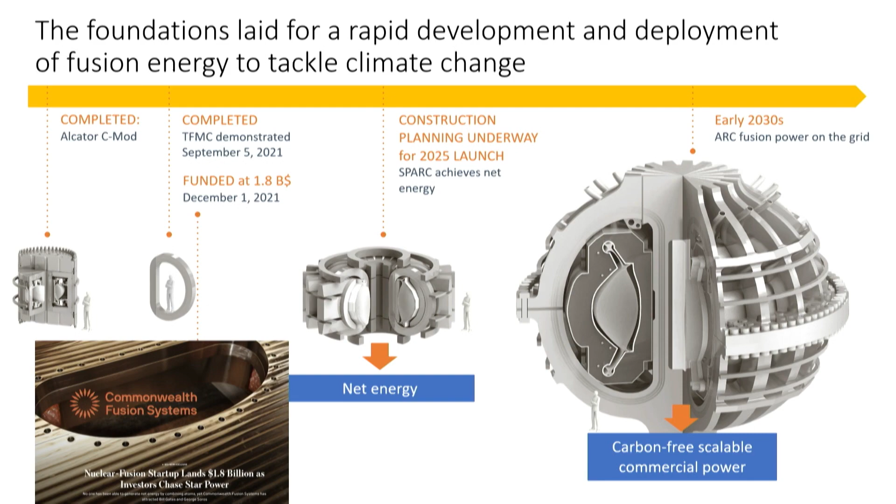But part of this plan all along was that it was a plan. It was, we're going to step through these innovations in a particular order because we believe this is not only what the science and technology asks for, this is what the market will ask for. So right now we're in the middle part. We're building this thing in the middle called SPARC, which will demonstrate net energy from fusion in the middle of the decade. But the end goal is actually to do what I said at the beginning of this, make massive amounts of carbon-free energy, and that's done with a thing which is on the right, which is essentially a commercial scale pilot, which would do that.

So what does it look like? So this is happening, now. So SPARC, there you can see it. You can see the people standing beside it. This makes about 150 million watts of fusion power. It has net energy gain at a commercial scale for the first time. And where is it being built? So it was designed at MIT, by MIT and the company we spun out, Commonwealth Fusion Systems.

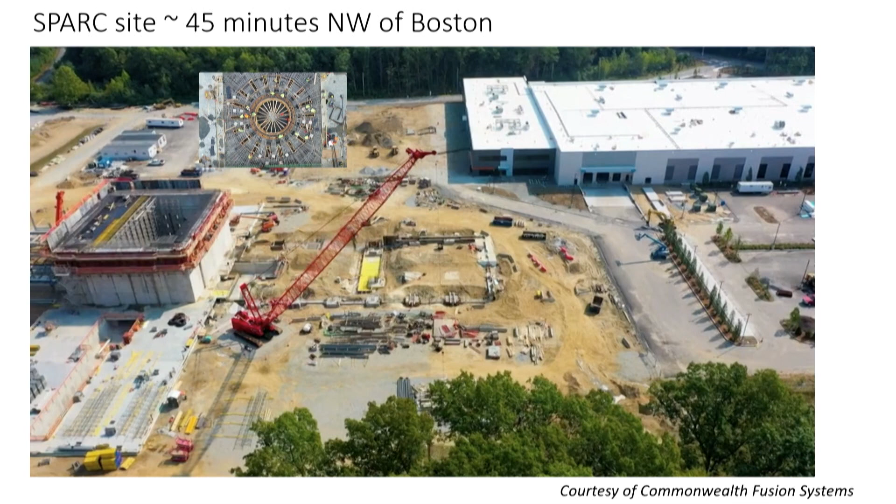And I always like this picture the best because you know it's real when you're pouring concrete. So this is the site, which is 45 minutes outside of Boston, that's run by Commonwealth Fusion Systems. The large building over on the left contains the fusion device, and the large building over on the right contains the factory, which is now making the magnets that were developed at MIT at a commercial scale. So within less than a year, we actually had a commercial facility that translated the technology that was being done at MIT. Because unfortunately it's not just about economics, it's actually about meeting the demand as fast as you can as well.

So since we spun out Commonwealth, this is what we're starting to turn our focus towards at MIT at the Plasma Science and Fusion Center. And it's based around this essential platform, which uses that magnet technology to confine that very hot plasma and to extract the energy which comes from it. And just to put a little bit of context on it, it's pretty amazing technology. You can see the people standing beside it. This basically powers Boston. It has zero carbon emissions, and the fuel that it would use in a single year I can carry in my arms. That's kind of how amazing fusion is.

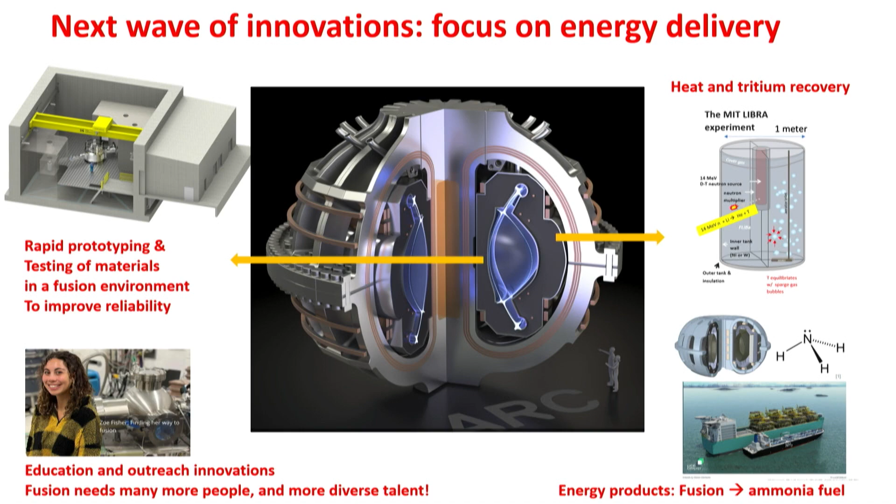You saw comments about decarbonizing or getting to net zero in airport and airline transportation. Maritime shipping, an extraordinarily large fraction of what we do. But how would you do that? So this was an interesting innovation that came in my class, where we considered using fusion to produce large amounts of hydrogen to make carbon-free ammonia fuel, and what the implications would be. And I have to conclude with the final one, because it's MIT.

What's the other innovation that we need? It's actually not in the technology per se. It's about how we educate ourselves as leading scientists, but also obviously the next generation of people who are coming along. We have to give them the tools, resource-wise and otherwise, because they're so motivated to tackle this problem. And so we need to be thinking as educators all the time about how we innovate in our structure to empower them so that we can get to that answer.